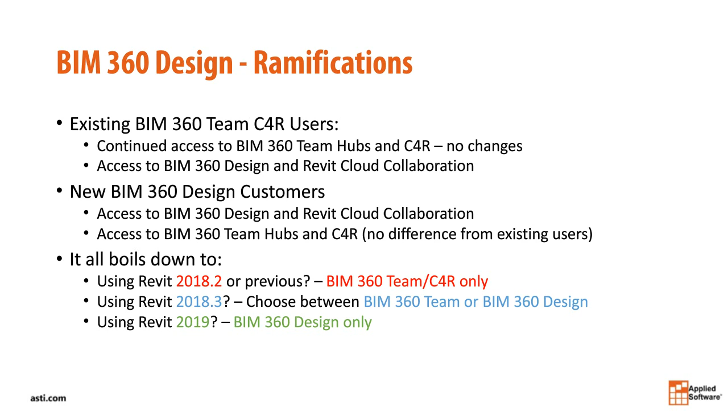One thing to be aware of, if you are an existing BIM 360 Team customer and you're using the Revit communicator, which is sort of a built-in instant messaging system for BIM 360 projects, that is no longer available with BIM 360 Design. And from what I understand, the reason they had to take it away was it violated some of the privacy protocols in the EU. And they just decided it was better to do away with it and let you rely on other instant messaging platforms if you need to use some sort of IM system with your BIM project. So that's really the only downside to going to BIM 360 Design, if you want to call it that.

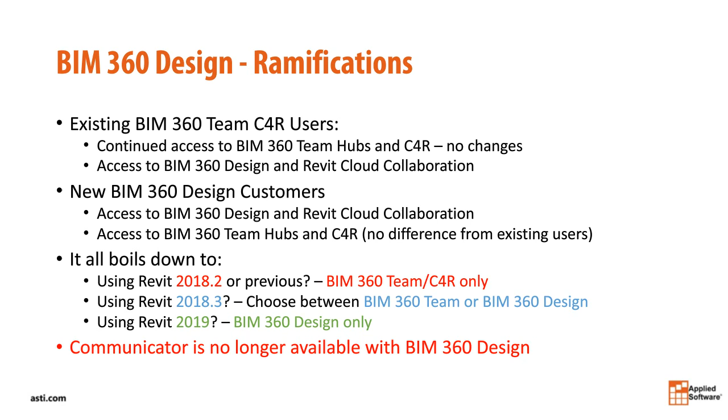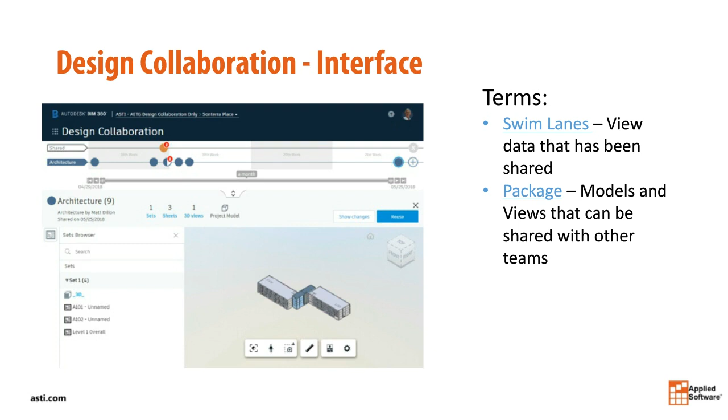You define what that package is, and once the package is defined, then you can choose to share it with other teams. So until you share, all of this stuff happens inside your team. Other teams don't necessarily see it unless you want them to. But once you share a package, then other teams have access to it, and they can then consume those packages if they choose. So some critical terms here to be aware of. So let's go through how the workflow works.

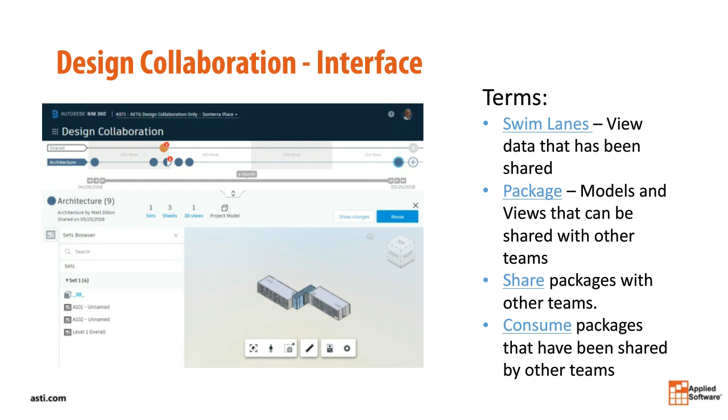Now, I need to apologize a little bit here. Normally, I like to demonstrate things like this live. I don't do a live demonstration in this presentation simply because a lot of what happens here when you kick off an event in BIM 360 Design, it takes 2 or 3 minutes for it to actually process so you can move to the next step. In the normal course of a project, it's no big deal. That 2 or 3 minutes is nothing to worry about. You probably won't even notice it for the most part. But in the course of a demo, it tends to make things drag on a little bit while we sit here and watch the little circle spin around. So I'm going to be showing you a lot of screenshots of what this looks like and talking about how this flow works, but I won't be doing an actual live demonstration.

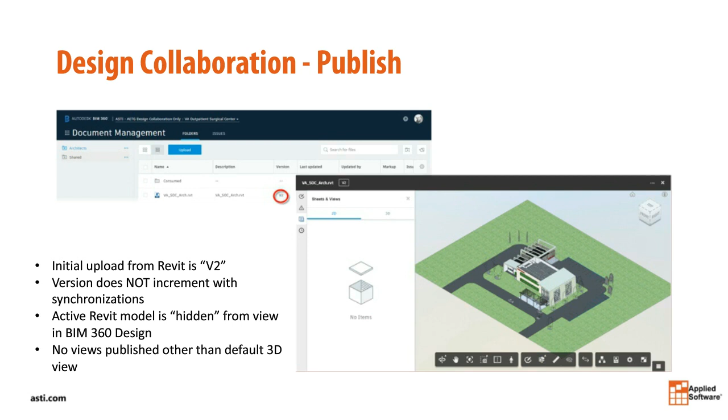So again, that active Revit model is hidden from view, and the only views that are published are those that you specify when you define those sets. So it's very important to pay attention. What views am I going to publish, and then make sure you do publish on a regular basis. I would recommend doing it once a day, and the reason for that is those previous versions are your backups.

So when you publish, all those user-specified views and sheets are published along with it, and the version that you see increments now to version 3, and version 2 is still there. You can access version 2. You can literally click on the version number here, and it'll show you the previous versions, and you can promote a previous version to be current in the unlikely and hopefully very rare occurrence of any corrupted data. You've got a backup, and this is where your backups are, by publishing. Okay? So very important. Even if you don't intend to share the data yet, go ahead and publish once a day at least.

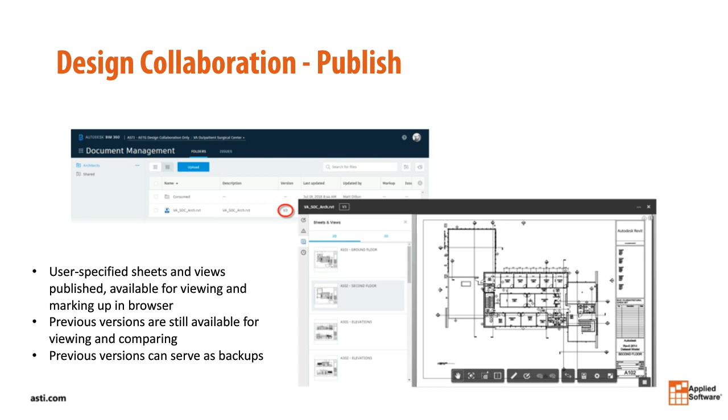But when you do publish, again, the browser increments to the next version, and then you can create a package. So that would be the next step, is to go ahead and create a package if you're intending to share it. If you're not intending to share it, no need to create a package.

To create a package, you're going to be in the Design Collaboration module, and you simply click the plus sign on the end of your swim lane. So in this case, again, I'm an architect. I'm clicking the plus sign here to create a new package to share with the other teams.

I go ahead and choose the set. This is the same set that we saw on the previous screen that was published. So I'll go ahead and choose that and save it, and I'll see this on my swim lane, which indicates to me there's a package that I have created that has not yet been shared with other teams.

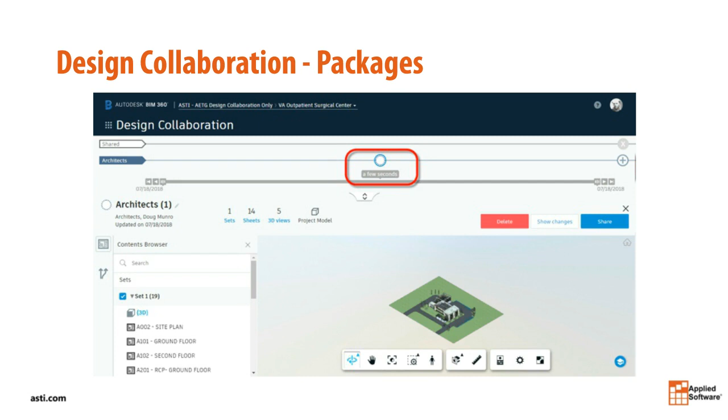So now that the package is created, I can then share it. And that's usually done right after you create the package. Just create the package, save it, and share it. And when you share the package, it kicks off a couple of things in BIM 360. First off, it actually copies that package to the shared folder that I showed you briefly earlier. We're going to take another look at that in a minute.

It also displays the package on your swim lane for other teams to see. So this is when you're exposing the data for use by other teams. And so you click on the share button, and that's all you have to do. At that point, you would see it, for your team, this filled in. Actually, I think this will show it. Yeah, so this shows I have shared this package with other teams.

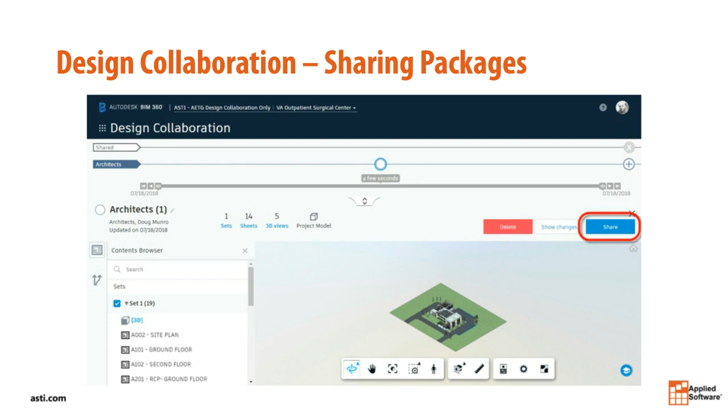Other teams will look at, let's see if I've got a slide that shows that. Nope. Other teams will look, when they see this on the architect swim lane, if I was logged in as, say, a structural engineer or an MEP contractor, what I would see on the architect swim lane would be an open circle at this point where nothing had been before, telling me that there's a package ready to be consumed if I want to.

But again, in addition to displaying that on the swim lane, it also copies the Revit model to the discipline or the teams folder under the shared folder. All other teams have access to these folders. They don't have edit permissions to these folders, but they have view permissions. So this now is available to be linked by another team into their project. Okay, so by copying it to the shared folder, we're giving them immediate access to it.

Okay, so once that happens then, this other member of the project, in this case the structural engineer, is going to link into Revit from the shared folder, right? So they're choosing to link it from the shared folder, so here's what will happen. If it's in the swim lane, they will see, yes, the architect or some other team member in this case. You can actually hit these little chevrons here, and that'll expand it out so that you see each individual team. But basically, this is telling me that, hey, somebody shared some data here.

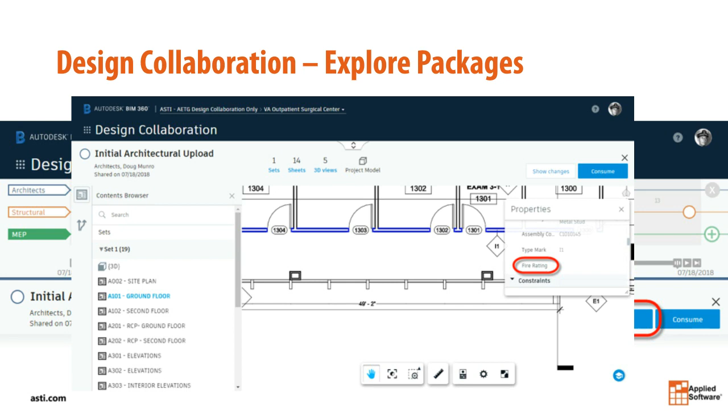And it takes me to the same viewer that we use for every other purpose in document management. And here I can click on objects and get their Revit properties. I can do things like get path distance, in this case travel path. Why an MEP engineer would be interested in that, I don't know. But there we have it.

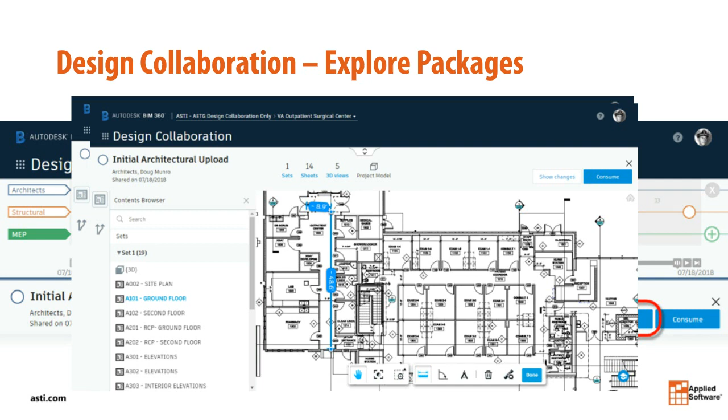So again, you've got all the view capabilities, so you can see what's available for you and then decide, do you want to consume it? If you do, then you go ahead and click on the dot, click on the consume button, and that will then cause the file to be copied to your team's consume folder. So here's the MEP engineer's team folder. There's a consume folder underneath there. Now the architect's folder is there with their document, and that's where the MEP engineer is going to link it from.

So we can link from two different places, consumed or shared. Why two places? And when would I link from one versus the other? It really comes down to how you want your links to update.

If you link from the shared folder, then anytime the architect, in this case, or whoever you're linking from, anytime that team shares that or publishes that project and shares it again, your link will automatically update, right? So when they do the share, it's going to copy a new version on top of this Medical Center RVT file. If you already had that linked into your project, your link just got updated because it overwrote this one. Didn't really overwrite it, but it's now the next version.

If you don't want that, if you want to control when your links update, that's when you go to the consumed folder, because then the only time you're going to get an updated link is when you choose to consume that data again, and then it will copy it back into the consumed folder on top of the original. And then your link will update. So I'm a big fan, frankly, of going to the consumed folder. That way I have total control over when that data is consumed.

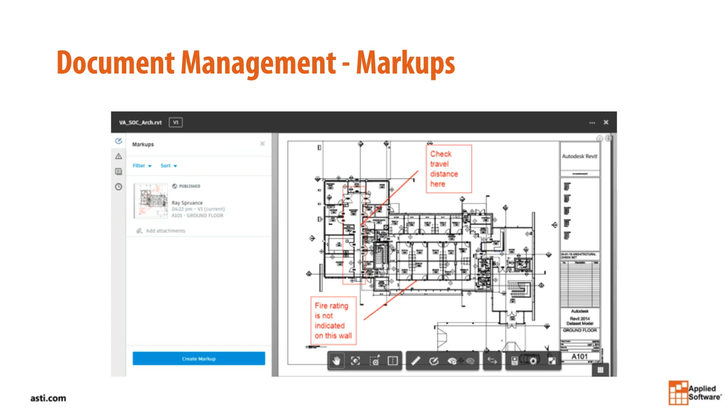Instead of just doing a markup, you can create an issue. All you have to do to create an issue is, while looking at a document, click on the little issue button, drop a push pin where the issue is, and notice it can include markups. Its status is automatically set to open. Give it a brief description.

I've assigned this to a specific person with a due date. So when I save this issue, this person will get an email with a link that will take them right to this. At that point, they can choose to answer it, ask questions, whatever. We can get a dialogue going back and forth that we can track.

Once the issue is resolved, the person who created it can choose to close it as resolved. So that's a real simple, basic functionality of document management you can take advantage of. There are other things in document management as well — you can set up review workflows for more complex scenarios where multiple people need to review a series of documents, and set up transmittals, etc.

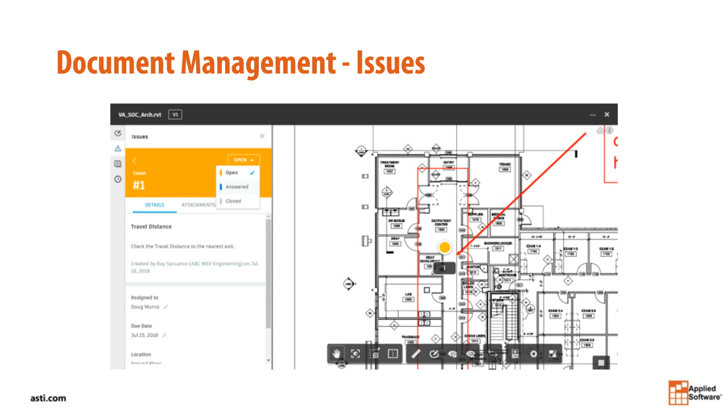Okay, so let's talk about some troubleshooting — common mistakes and errors that people get with BIM 360 — and most of these are very, very easy to resolve.

No access to BIM 360 — so you're in Revit and you try to initiate cloud collaboration, and it just comes back and says you don't have access to cloud collaboration. Or you go to log into a BIM 360 project and it doesn't let you do anything. That's probably because the BIM 360 Design entitlement has not been assigned to you.

What happens with BIM 360 Design is the contract manager for your subscription contract needs to assign that entitlement to specific users. Once you've got that assigned to you, you can collaborate on any BIM 360 Design or BIM 360 Team project, whether it's on your site or one you've been invited to by someone else. Without that, you'll get warnings that you don't have any access. That's a pretty simple one.

You may have access, but then when you go to BIM 360, you don't see any projects. Or if you're in Revit, maybe you can go to BIM 360 and see the project and the data in it, but then when you go to Revit, you can't get to the project — you don't see it in Revit. You don't get any errors, you just don't see the project. Well, that could be a couple of things.

First off, you have to have been invited to the project, so you want to make sure that's happened. The way you check is just go to the project in your web browser — can you see it there? Okay, that means you've got BIM 360 Design and you've been invited to the project.